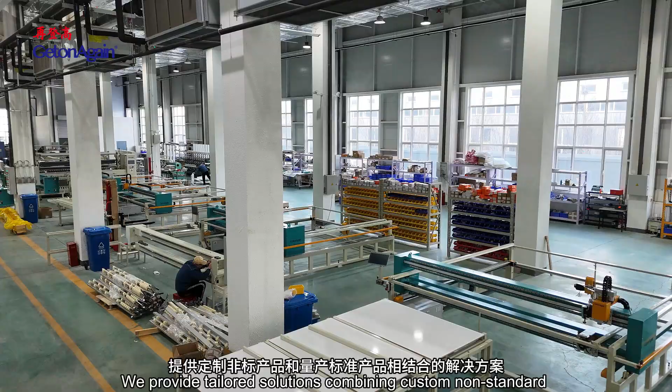We provide tailored solutions combining custom non-standard products with mass-produced standard products, including mechatronic machines, automated production lines, and intelligent factory solutions. Pattern room equipment includes magic inkjet plotter, 2 cartridge with maximum printing speed at 110 square meters per hour.

4 cartridge with maximum printing speed at 200 square meters per hour. Vertical inkjet cutting plotter, 1 machine multiple functions, pattern drawing with cutting, or standalone drawing. High-quality rotary cutting knife can cut minimum 80 grams per square meter paper for sample design, cost saving.

Flatbed inkjet cutting plotter, full speed map printing and cutting function, suitable for personalization, configured with long knife or short knife, and optional fixed knife sleeve or elastic knife sleeve, suitable for cutting various materials.

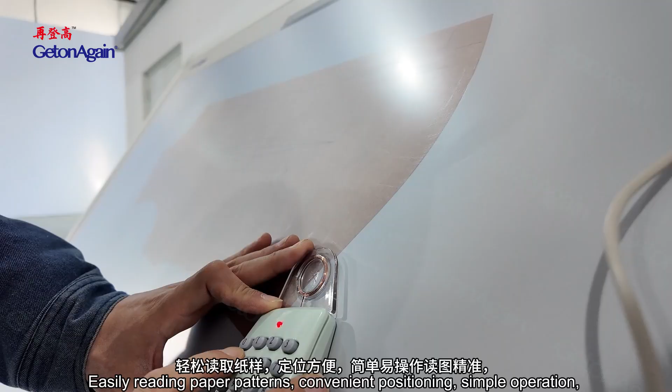Digitizer, easily reading paper patterns, convenient positioning, simple operation, accurately reading patterns, enable to speed up the design. It is a powerful tool for traditional manual drawing digitization.

Digitizer can be used in various fields, such as clothing industry, fashion design, surveying and mapping, mining, stamping and environmental protection, etc. Flatbed scanning digitizer.

One button to start after placing scanning pieces. Can vacuum absorption auto scanning auto transmission. According to different models, supports ultra long width scanning. Scanning speed up to 7,200 mm per minute.

Scanning resolution 150 to 300 dpi. High definition panoramic 1:1 image to ensure effective identification of various contours, notches, inner holes.

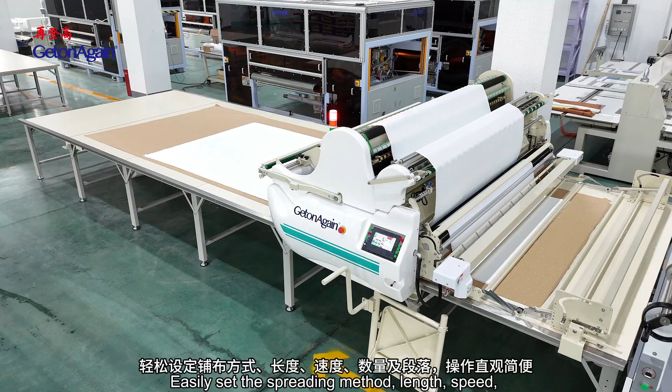Cutting equipment includes automatic spreading machine. Easily set the spreading method, length, speed, quantity and sections, with intuitive as well as simple operation. Dual use for both knit and woven fabrics, suitable for t-shirts, children's clothing, loungewear, and toy textiles.

Automatic multi-layer cutting machine. Through the combination of micron-level intelligent sensing components and an intelligent control system, dynamic compensation and correction of cutter deformation during cutting operations are achieved, significantly reducing errors between the top and bottom layers of fabric during cutting, enabling truly high-precision intelligent cutting.

Automatic single-layer cutting machine. No need to create specialized cutting molds. Cutting can be performed precisely by directly importing CAD design drawings into the equipment. Optimizes cutting paths, integrates repeated cutting lines, allows for pre-simulation of the cutting process, and supports continuous cutting for extra long materials.

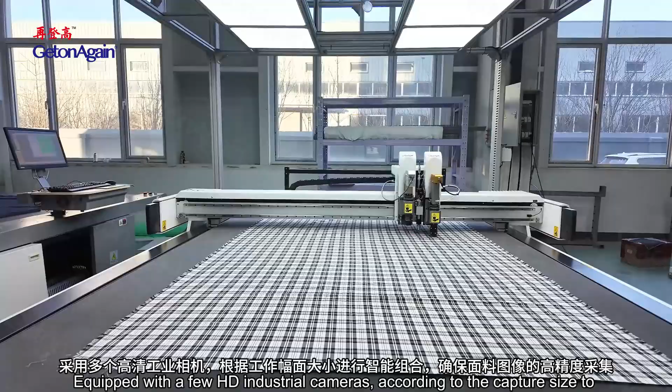Stripe and plaid matching cutting machine, equipped with a few HD industrial cameras, according to the capture size to perform intelligent combination. Ensures the high accuracy fabric image capturing.

Stripe and plaid matching auto cutter, equipped with double knives and pen draw punching working mode, special for various stripes and plaids fabric cutting in single ply.

High-end clothing customization. The effect of the alignment match stripe and plaid process has become an important measurement of the quality of this type of clothing.

Stripe and plaid auto cutter is the equipment specially developed for this process to meet matching stripe and plaid clothing, suitable for single ply cutting. Process of striped plaided fabrics.

Precision single head cap, tubular embroidery machine. Pattern rotation and proportional scaling.

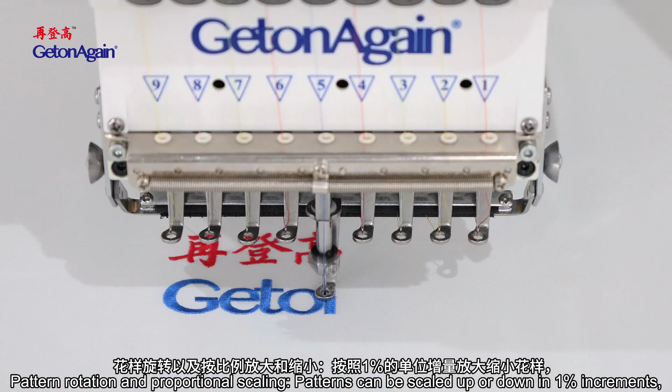Patterns can be scaled up or down in 1% increments, ranging from 50% to 200%, and rotated in equal increments, with a rotation range from 0 degrees to 89 degrees.

Precision two-heads cap, tubular embroidery machine, equipped with automatic color changing, automatic thread trimming by motor, servo motor thread hooking, and automatic thread broken detection.

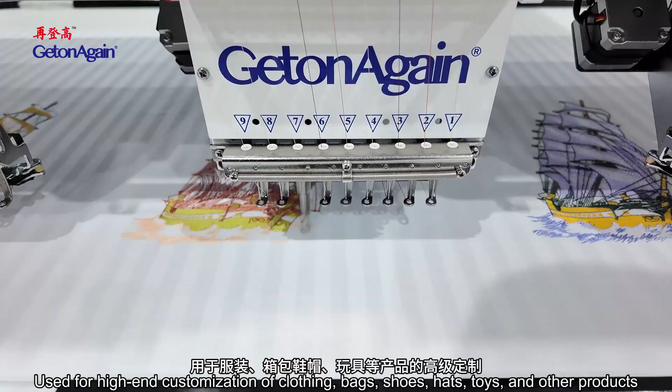6-head flat embroidery machine, used for high-end customization of clothing, bags, shoes, hats, toys, and other products.

Computerized embroidery machine. High-speed embroidery with extremely low failure rates, long service life, low noise, and stable, reliable quality. Equipped with an upper thread clamping device to prevent thread detachment and breakage, ensuring excellent embroidery results.

Suitable for textile and garment manufacturing, footwear, hats, bags, home decoration, automotive interiors, and industrial products area.

Embroidery equipment includes Cloud Smart Teaching Embroidery Machine, suitable for integrated theoretical and practical teaching of computer embroidery in fields such as fashion and apparel design, clothing design and its engineering. Mixed chenille chain stitch embroidery machine.

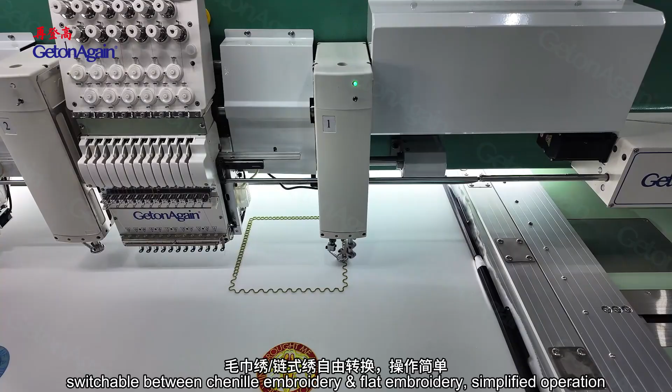Mixed embroidery feature, according to color sequence settings, switchable between chenille embroidery and flat embroidery, simplified operation. Chenille needle height can be adjusted for 10 levels according to chenille pile height or chain stitch thread thickness.

Multifunctional embroidery on garment, shoes, caps, home textile, toys, bags and luggage, art thread, etc.

Multi-head tubular embroidery machine, multi-head series, suitable for embroidering on flat, caps, garments, shoes, belts, bags, etc. Features auto thread trimmers, auto color change, auto thread break detection, 270 degree wide angle cap system, red light locating, and LED lighting, with precise head and drive system to ensure exquisite embroidery work. Drop tables easily lift up and down. Multiple heads greatly improve work efficiency, suitable for embroidery shops and factories of a certain scale.

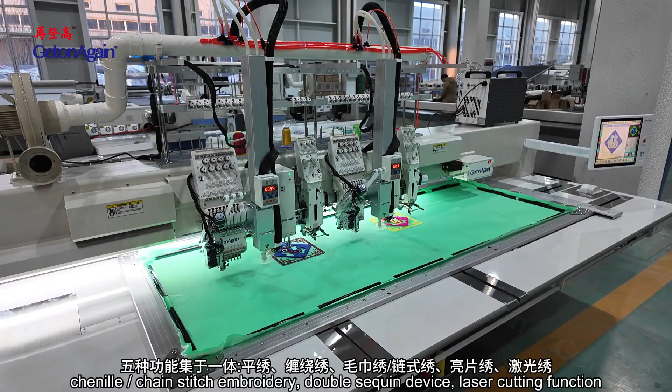Computerized 5-in-1 embroidery machine, integrating 5 functions in one machine: flat embroidery, quilting, tape cording embroidery, chenille, and chain stitch embroidery, plus double sequin device and laser cutting function. High precision, strong stereo sense, ideal artistic effect, suitable for embroidery of apparel, home textile, furniture, teaching, design, and arts and crafts, etc.

Computerized mixed embroidery machine, multifunctional integration with flat embroidery, cording embroidery, chenille, chain stitch embroidery, sequin embroidery, and laser embroidery. Expandable options support additional modules such as laser process, with fast switching between flat embroidery, quilting embroidery, or chenille embroidery, allowing you to choose any embroidery type as needed. Suitable for embroidery on garments, home textiles, home decor, education areas, R&D, and arts and crafts products.

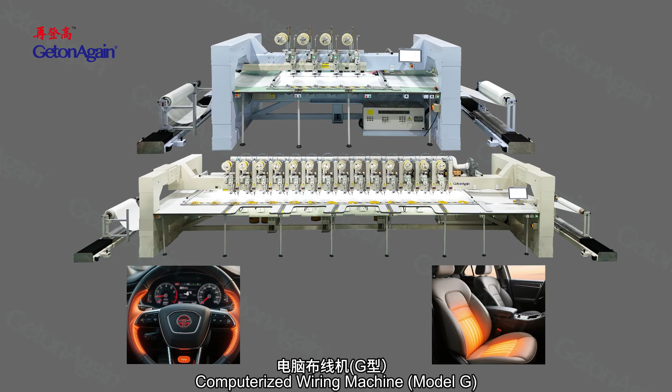Computerized wiring machine Model G. Gantry frame design ensures easy material loading, unloading, and maintains material flatness during wiring. Large spool device reduces heating wire replacement frequency during production. Automatic wire feeding device for resistance wire or other wires, with adjustable feed amount and feed fault alarms. Automatic product changeover, with roll fabric feeding in from one end.

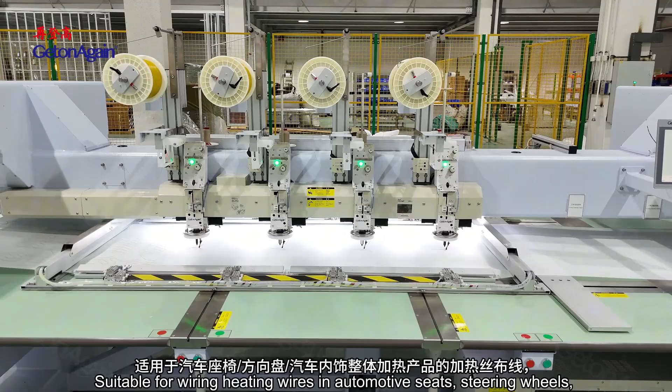After wiring, automatic take-up device pulls material with adjustable length, reducing manual pulling time and labor. Pneumatic frame with program-controlled pneumatic components for automatic opening, closing, and tensioning. Firm clamping with adjustable stretching lengths within a specified range. Suitable for wiring heating wires in automotive seats, steering wheels, and complete interior heating products, also applicable for automotive hands-off detection hot product wiring.

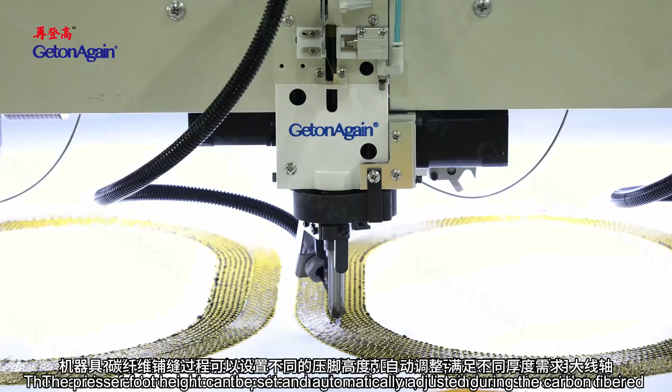Carbon fiber placement stitching machine, suitable for the layup and stitching of carbon fiber materials in industries such as automotive, aerospace, and bicycle manufacturing. Enables precise stitching with an independent feeding path for carbon fiber, significantly reducing fiber abrasion and ensuring material integrity. Enables highly accurate stitching of carbon fiber fabrics. Stitch width can be set according to different material specifications, and presser foot height can be set and automatically adjusted during the process to accommodate different material thicknesses.

Tufting series equipment includes computerized tufting machines with rotary tufting head at any angle, avoiding positive-negative stitching difference, for higher efficiency and better tufting result. Suitable for various rugs, carpets, hanging carpet, tapestry, and other flooring, decorative, and home furnishing products tufting.

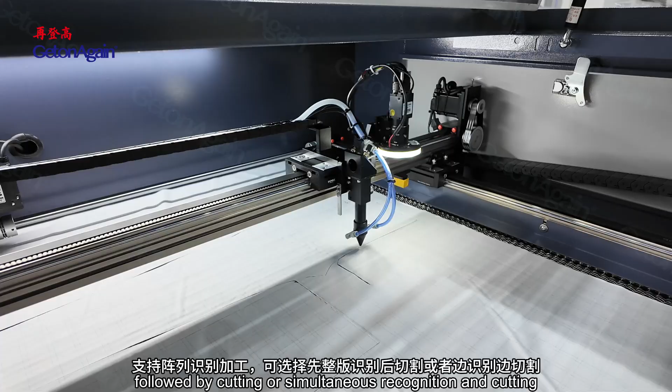Laser equipment includes small format camera positioning laser engraver cutting machine, supporting array recognition processing, with options for full sheet recognition followed by cutting, or simultaneous recognition and cutting. Features multi-template mixed cutting, allowing the recognition and positioning of different patterns to be completed in a single operation.

Laser engraving and cutting machine. The cutting center can directly and seamlessly interface with software such as AutoCAD, CorelDRAW, AI, and Garment CAD, ensuring easy operation, high cutting precision, and fast cutting speed. Suitable for clothing, home textiles, furniture, luggage, toys, car interiors, shoemaking, and other industries for cutting and carving of non-metallic materials.

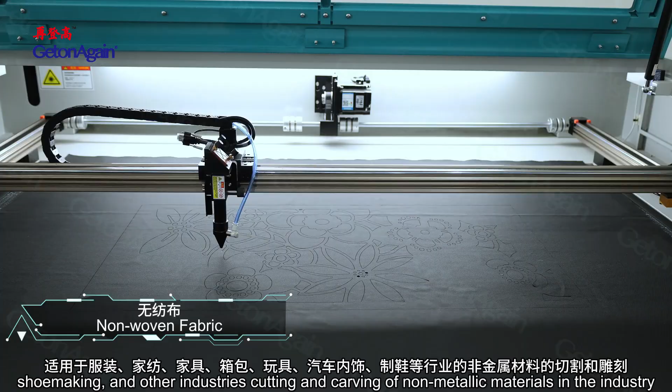Automatic feeding laser cutting machine, large format vision recognition plus auto receiving table. Advanced vision system with high resolution industrial camera captures real-time images of material patterns, accurately detects outer contours to perform precise cuts, resolving issues such as distortion in printed or stretched fabrics. Choose the most suitable positioning mode for different pattern types to optimize cutting accuracy and efficiency. Supports edge alignment and tension control to ensure smooth, wrinkle-free material feeding.

Highly automated, ideal for continuous production. Designed for precise, high-efficiency cutting of flexible materials such as digitally printed fabrics, lace with pattern alignment and shaping cutting, and heating elements with positioning requirements.

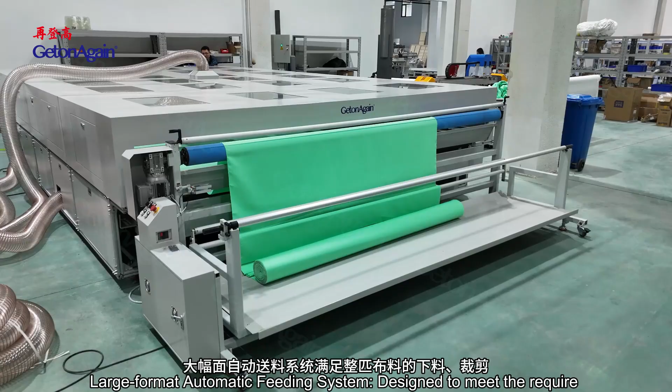Fully automatic large format laser cutting machine with inkjet device. Large format automatic feeding system designed to meet the requirements for feeding and cutting whole rolls of fabric, with inkjet and cutting functions integrated for enhanced versatility. Applicable to industries such as custom clothing, single-piece cutting, sofas, toys, footwear and headwear, textile print pattern positioning cutting, automotive interiors, industrial filtration, and advertising, etc.

Sewing equipment includes automatic arbitrary rotary single-needle leather sewing machine, suitable for automated leather pattern sewing in the fields of automotive interiors, car seat covers, car door panels, airplane seats, and leather furniture upholstery.

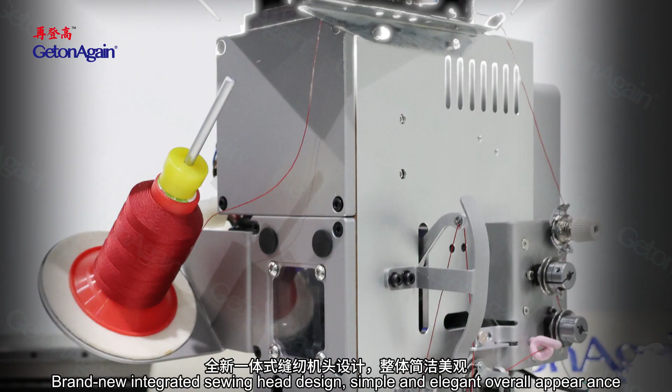Brand new integrated sewing head design, simple and elegant overall appearance. 15-inch HD industrial touch control screen. Two-size workbenches designed with a flexible mechanism, reducing size after folding for easier transportation.

Sewing head can rotate at any angle, avoiding differences between forward and reverse stitches, improving sewing efficiency and stitch quality. Pneumatic lifting head structure with a stroke of 50 mm, making frame changes and span sewing more convenient.

The advantage of an independently driven presser foot system lies in its ability to control presser foot height through real-time pattern programming, effectively addressing uneven presser foot pressure issues when sewing materials of varying thicknesses.

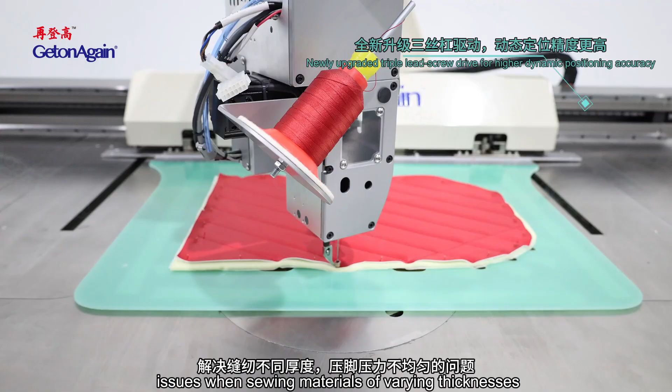Fully automatic 360 degrees template sewing machine with auto feeding. Ideal for automated sewing of thin and thick materials including quilted garments, down jackets, pillowcases, etc. Dual auto feeding system enhances efficiency and reduces operator fatigue.

Vertical head lift for easy template replacement and convenient step-over sewing. Reinforced casting body ensures consistent stitches even at high speeds, no head sinking.

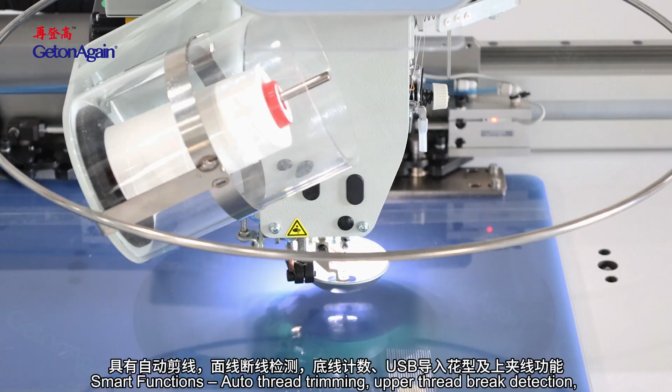Smart functions include auto thread trimming, upper thread break detection, bobbin counter, USB pattern import, and top thread clamping.

Fully automatic 360° double needle heavy-duty template sewing machine, used for automotive seats, automotive airbags, automotive interiors, home furnishings, and other double thread heavy-duty sewing.

Features include automatic thread trimming, emergency stop, thread breakage detection, bobbin thread counting, data input saving, and automatic adjustment of sewing direction. Fully servo motor control ensures high equipment stability and guarantees high-quality sewing results.

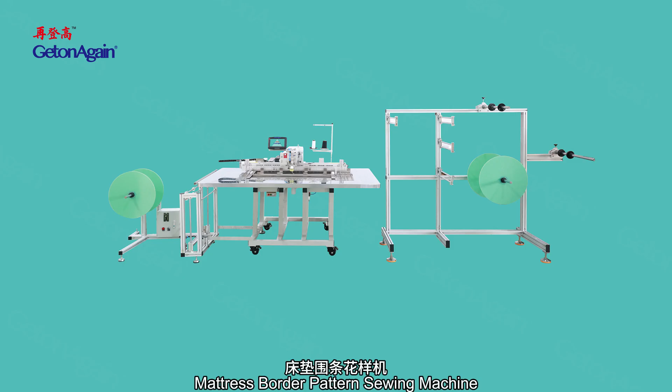Mattress border pattern sewing machine. Pneumatic presser frame securely holds fabric in place for more beautiful stitching and allows for wide-range horizontal frame movement.

Machine head with micro-oil head design ensures fabric remains free from all contamination during sewing. Pneumatic positioning device guarantees high-precision alignment at panel joints.

Features automatic thread trimming, automatic material collection, and machine error alarm for ease of operation. Standard configuration with feeding and collecting racks for streamlined workflow. Advanced sewing technology for mattress side borders.

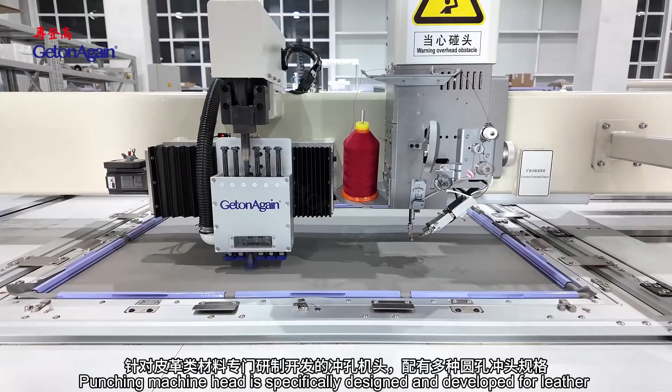Fully automatic perforation and sewing integrated machine. Punching machine head is specifically designed and developed for leather materials, equipped with various round punching tool specifications.

Sewing head up moving stroke of 50 mm, providing sufficient space for material loading and easy operation. Suitable for perforation and sewing processes of various types and thicknesses of genuine leather and microfiber leather used in car seats, automotive interiors, aircraft seats, luggage, furniture, and more.

Fully automatic embroidery and sewing integrated machine. 9-color embroidery machine head to meet the embroidery needs of different industries. The embroidery thread clamping mechanism incorporates a novel upper thread clamping assembly, effectively reducing thread breakage and slippage occurrences during operation.

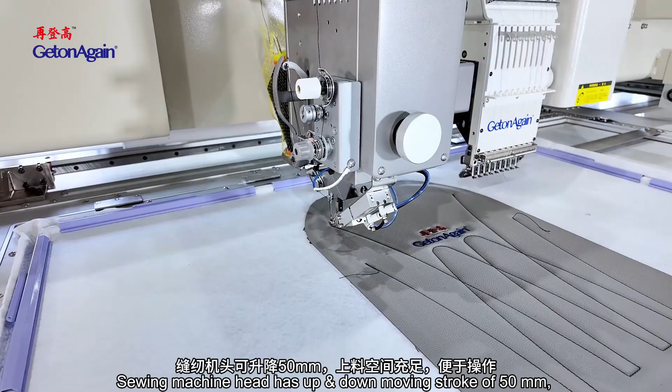Specially designed sewing machine head for leather materials, producing beautiful stitching. Presser foot height is motor controlled and highly adjustable. Sewing machine head has up-down moving stroke of 50 mm, providing ample space for material loading and ease of operation.

Suitable for various types and thicknesses of genuine leather and microfiber leather for automotive seats, car interiors, aviation seats, luggage, furniture, etc., combining embroidery and sewing processes.

Fully automatic perforation round hole, embroidery, and sewing rotating head machine. Integrates punching, embroidery, and sewing into one machine, allowing for arbitrary pattern design and seamless combinations of punching, embroidery, and sewing for complex processes. The 9-color embroidery head meets the embroidery needs of various industries.

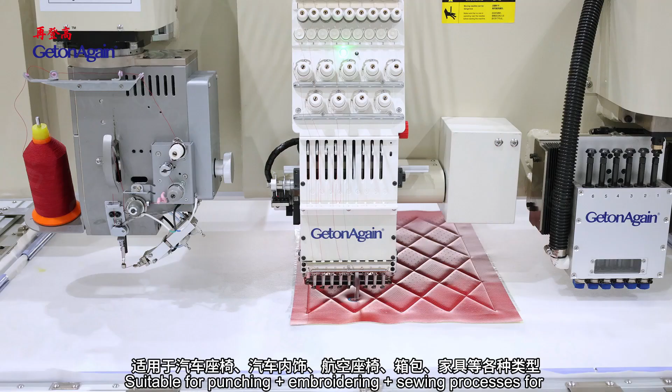Sewing machine head features an arbitrary rotation structure, creating beautiful stitching, reducing frame movement frequency, and improving efficiency. Suitable for punching, embroidering, and sewing processes for various types and thicknesses of genuine leather and microfiber leather used in automotive seats, car interiors, aviation seats, luggage and furniture, etc.

Fully automatic round perforation and 9-color embroidery and fixed head sewing machine, Super M. Integrates punching, embroidery, and sewing into one machine, allowing for arbitrary pattern design and seamless combinations of punching, embroidery, and sewing for complex processes. The 9-color embroidery head meets the embroidery needs of various industries.

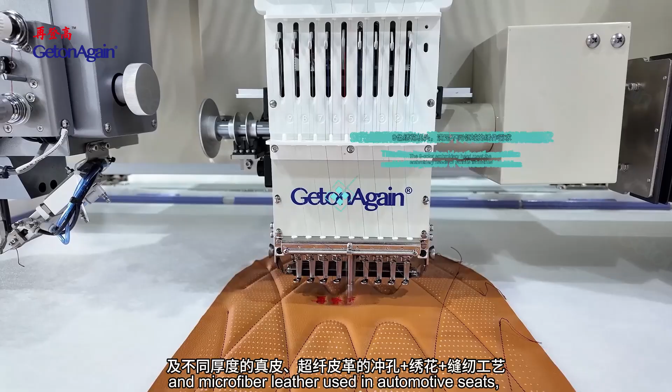Sewing machine head features an arbitrary rotation structure, creating beautiful stitching, reducing frame movement frequency, and improving efficiency. Suitable for punching, embroidering, and sewing processes for various types and thicknesses of genuine leather and microfiber leather used in automotive seats, car interiors, aviation seats, luggage and furniture, etc.

The 9-color embroidery head meets the embroidery needs of various industries. Sewing machine head features an arbitrary rotation structure, creating beautiful stitching, reducing frame movement frequency, and improving efficiency. Suitable for punching, embroidering, and sewing processes for various types and thicknesses of genuine leather and microfiber leather used in automotive seats, car interiors, aviation seats, luggage and furniture, etc.

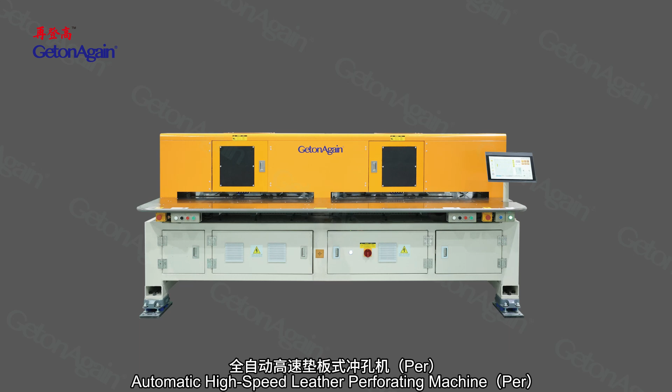Automatic high-speed leather perforating machine for punching processing of leather or microfiber leather with various types and different thicknesses, such as car seats, aviation seats, shoes, bags and furniture, etc. Full-scale, 3-dimensional protective design ensures safer operation.

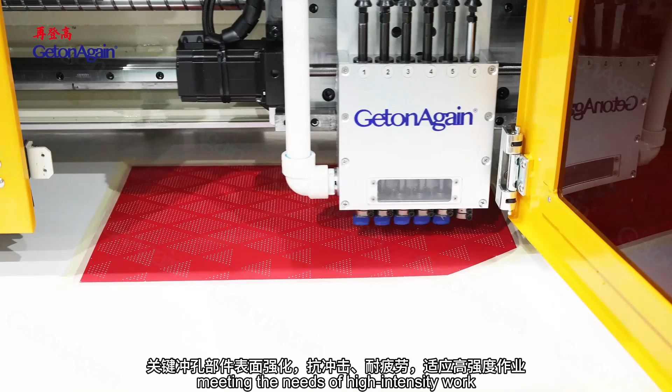The punch toolbox is heightened to prolong the punch tool's spring's service life and reduce part wear. The XY axis uses a ball screw direct drive for high-precision punching. The surface of key punching parts is strengthened to resist impact and fatigue, meeting the needs of high-intensity work. Single-head machines can make up to 2000 holes per minute, and double-head ones up to 4000.

Automatic template sewing machine, rotary head, heavy material. Both the X and the Y axis use a screw and slide transmission method, providing high precision and good stability. Suitable for pattern sewing on leather and heavy materials, such as car seats, sofas, massage chairs, boat interiors, and aircraft seats. The machine head can rotate freely to ensure the quality of the sewing stitches.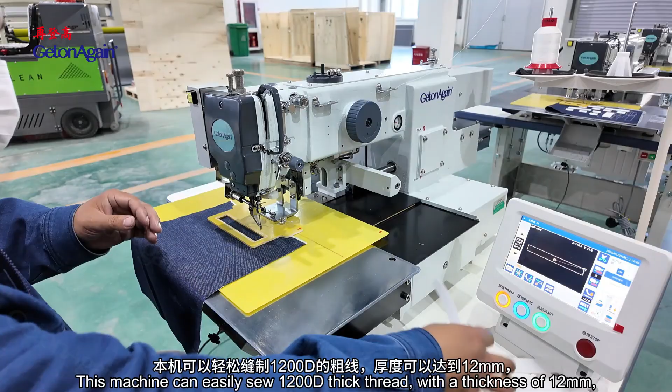Pattern sewing machine. This machine can easily sew 1200 D thick thread with a thickness of 12 mm, 2 times, large rotary hook, automatic thread trimming, and the maximum sewing speed can reach 2500 RPM.

Automatic laser pocket opening machine: automatic ironing-free pocket folding, automatic material feeding, laser pocket opening, automatic sewing, automatic thread trimming, and automatic material collection. For front and back pockets for men's and women's clothing, suits, inner and outer pockets of jackets, dress pants, hoodies, sun protection clothing, school uniforms, sportswear, cotton padded jackets, down jackets, workwear, jackets, uniforms, trench coats, cashmere coats, and plackets for polo shirts.

Quilt edge binding machine. Features of single needle compound feed, achieving cutting, binding, and sewing in one seamless operation. Enlarged right side waste discharge port with pneumatic waste discharge assistance ensures smoother disposal of waste generated during edge cutting.

Special synchronized feeding structure, including alternating presser foot, needle, feed dog, and binding attachment. Ensures no wrinkles or misalignment during straight line or corner sewing for a flawless binding effect. Designed for edge binding processes of quilts such as cotton quilts, summer quilts, spring and autumn quilts, and other bedding items.

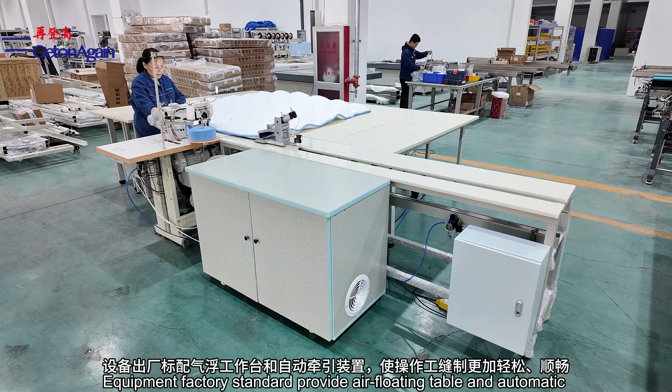Quilts and mattress binding with pulling sewing workstation. Equipment factory standard provides air floating table and automatic pulling device, making sewing worker operation easier and smoother. Equipped with PLC control pulling device synchronized with sewing machine electronic control, these two machines work at the same speed and synchronize direction.

Optional automatic storage and vacuuming device improves efficiency, reduces dust emissions, and provides the sewing operator a clean and tidy working environment. Binding result is rich with a strong, solid feel. Corners are smooth and nice. Evenly stitched length, no hairy edge, no edge folding, no corner raising effect, and other negative symptoms eliminated.

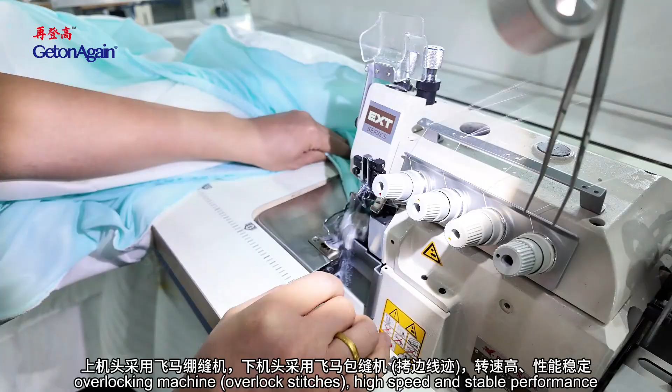Automatic mattress protector skirting sewing machine, interlock and overlock. Upper head with Pegasus interlock sewing, lower head with Pegasus overlocking machine overlock stitches. High speed and stable performance. Suitable for processing fitted sheets, all-in-one to finish binding stitching of elastic rope cord and bed skirt, and the overlocking of bed skirt to mattress protector topper layer.

Automatic mattress protector skirting sewing machine, edge overlock. Upper and lower head with Pegasus overlocking machine overlock stitches. High speed and stable performance. The upper and lower workpieces work synchronously, integrating the sewing of rubber band, banding, and the sewing of bed skirt to the mattress protector layer all finished in one.

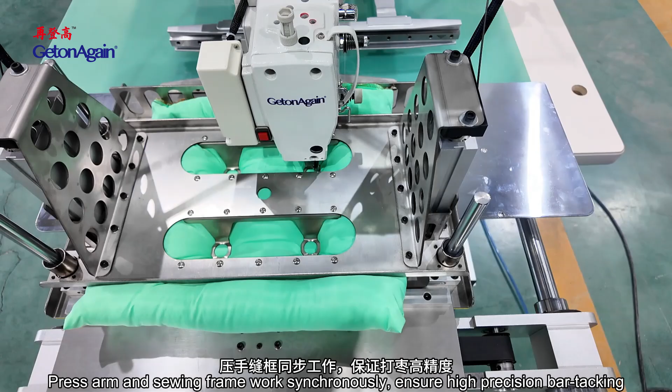Multi-hole bar tacking machine. Press arm and sewing frame work synchronously, ensuring high-precision bar tacking, suitable for chair pad, cushion and pillow, all those with fillings, and bar tacking requirements for reinforcing sewing work.

Long arm label sewing machine. Adopted connecting rod thread pickup, large rotary hook, needle bar, swinging up and down feeding simultaneously, forming zigzag lock stitch. Reasonable swing mechanism makes switching between zigzag sewing and normal lock stitch easy and free. Upper and lower synchronous feeding structure makes it easy to operate, with good sewing effect and beautiful stitches.

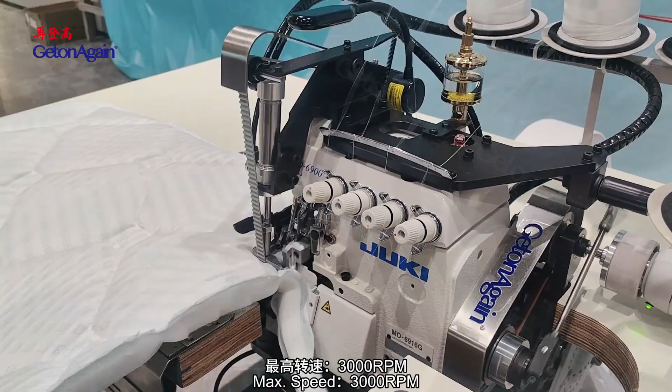Mattress flanging machine, equipped with a Juki machine head from Japan and a double bar twin needle design. Easily switches between thick and thin fabrics sewing. Flanging thickness 10 mm to 70 mm, max speed 3000 RPM, planing width 25 mm.

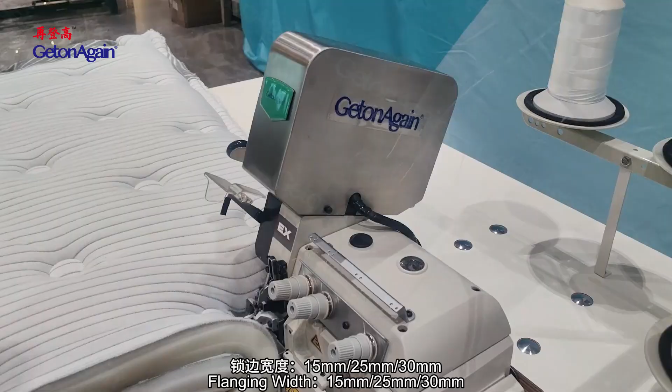High speed mattress flanging machine. Effortless switching between thick and thin fabrics sewing. Synchronized feeding presser foot structure provides excellent feeding capability, enabling ultra-thick fabrics that standard machine heads cannot sew to pass through smoothly. Flanging thickness 10 to 90 mm. Automatic lubrication and cooling system for the synchronized feeding structure. Max speed 4000 RPM. Flanging width 15 mm, 25 mm, 30 mm.

Heavy-duty mattress flanging machine. Innovative drive mechanism ensures more convenient and powerful sewing performance. Adjustable stitch length of 4.5 to 6 stitches per inch. Easily switches between thick and thin fabrics sewing. Capable of overlocking extra thick mattress fabrics ranging from 10 mm to 90 mm. Maximum sewing speed reaches up to 4,500 stitches per minute. Overlocking width is 25 mm.

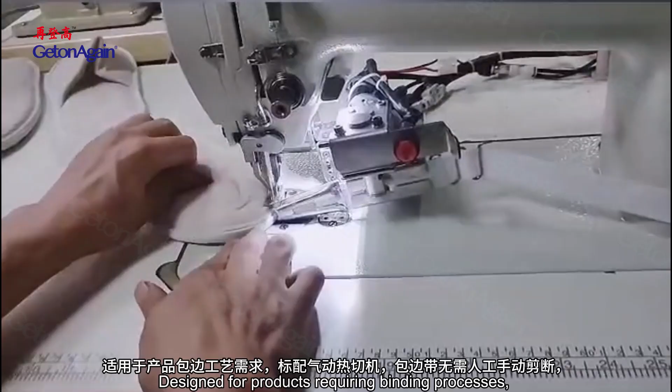Computerized synchronized hot cutting binding machine. Designed for products requiring binding processes, it is equipped with a standard pneumatic hot cutter. The binding tape no longer requires manual cutting. Simply press a button to complete precise cutting. The hot cutting edges are clean, with no fraying or loose threads, significantly improving production efficiency.

Mattress handle stitching machine. Fully automatic operation, controlled via touch screen. Customized stitching patterns is possible, significantly improving production efficiency. Easy to operate, precise positioning.

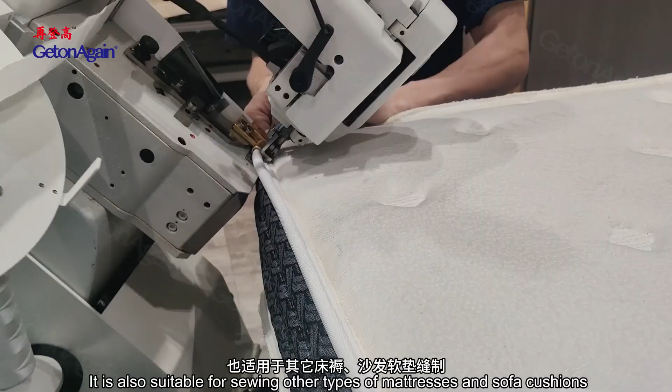Semi-automatic mattress tape edge machine, primarily designed for sewing spring mattresses. This machine efficiently completes edge overlocking between mattress fabric and sidewall fabric. It is also suitable for sewing other types of mattresses and sofa cushions. Key features include an electrically adjustable work table with high-strength, independent support, ensuring exceptional stability during operation.

Intelligent tabletop overlock flanning machine, equipped with a modified Juki thick material overlock machine head. Newly designed ultra-high lifting presser foot with a lifting height of 35 mm. Machine head can move, making threading and daily cleaning more convenient. Flanning thickness 10 mm to 80 mm. Easily switches between thick and thin fabrics sewing.

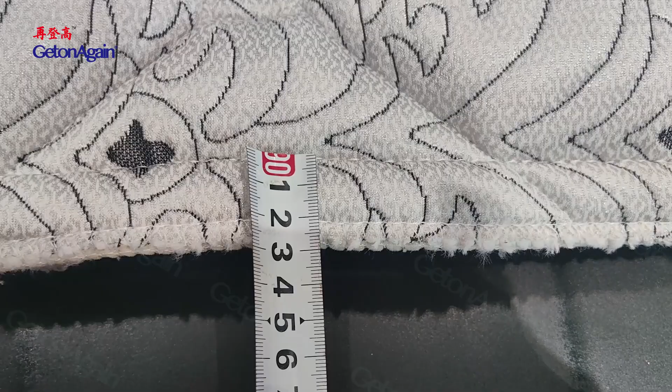Auto flip tape edge machine. Automated transfer table and mattress turnover arm enable the operator to work in one position without moving around. Variable speed drive automatically slows down on turning corners. The machine head can rotate freely to ensure the quality of the sewing stitches. When ready to sew the opposite side, the turnover arm unit flips the mattress automatically. Machine head height and inclination are adjustable.

Industrial sewing machines include various overlock and lock stitch machines. Flat tape edge machine, mainly used for stitching between mattress fabric and side border. Suitable for sewing other soft mattresses, bedding, sleeping bags, and tents. Stable performance, little vibration, low noise, and high efficiency.

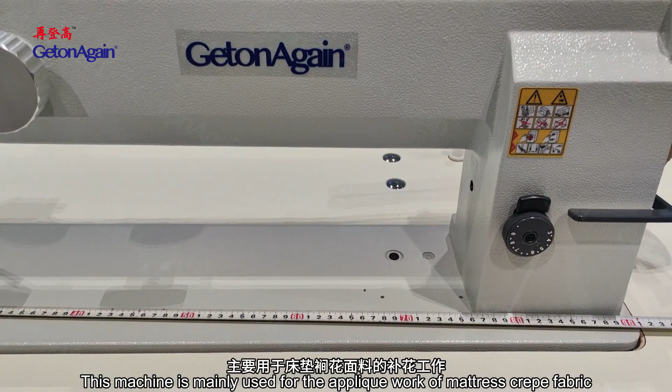Long arm repairing machine. This machine is mainly used for the applique work of mattress crepe fabric. The upper and lower shafts of the machine are of integral structure, and a Taiwan servo motor is used to automatically position the needle. The new presser foot is equipped with a needle bar lifting device to make the thick fabric appliqué more convenient and beautiful.

Quilting equipment includes the computerized multi-head rotary hook quilting machine model N, a double row lock stitch multi-head quilter with a large rotary hook. Max speed of 1500 RPM, more than 2 to 3 times that of a normal shuttle quilting machine, greatly improving work efficiency. 3-fold capacity rotary hook means less bobbin changing frequency. Beautiful stitches, no lost stitch, no thread loops.

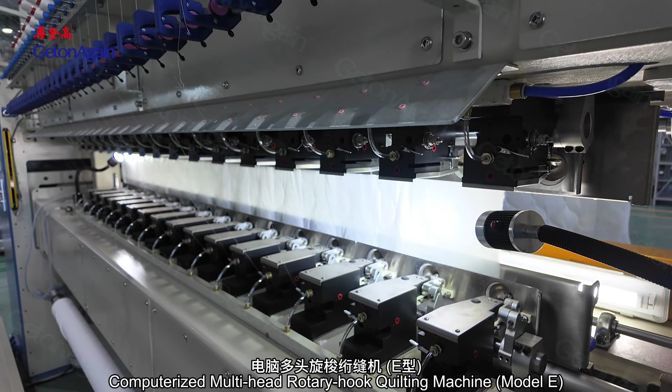Computerized multi-head rotary hook quilting machine model E, with a 5-time jumbo rotary hook for less bobbin changing frequency. Beautiful stitches, no lost stitch, no thread loops. The interval between the upper and lower needle bars can be adjusted to any value from 3 to 9 inches. The lower needle bar can move half a needle pitch in the X direction, so that quilting needle bars of different sizes and patterns can be combined, especially for non-standard size patterns, achieving a unique effect.

Computerized multi-needle shuttle quilting machine, flying shuttle type, for quilting of fitted sheets, bed covers, summer quilts, and clothing products with quilting patterns.

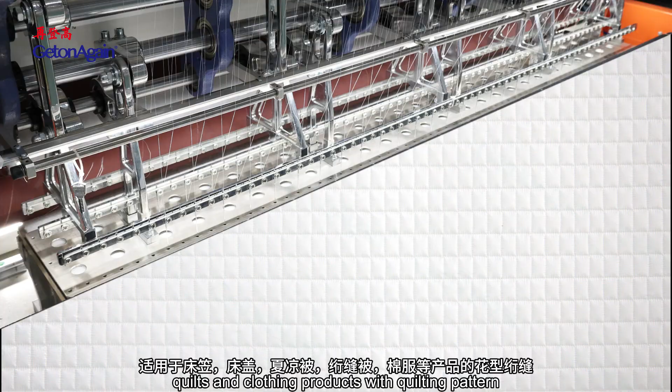Computerized multi-needle chain stitch quilting machine, servo motor-driven rollers and lead screws ensure precise quilting patterns, suitable for mattresses, mattress covers, sofas, bedding, home textiles, and home decor.

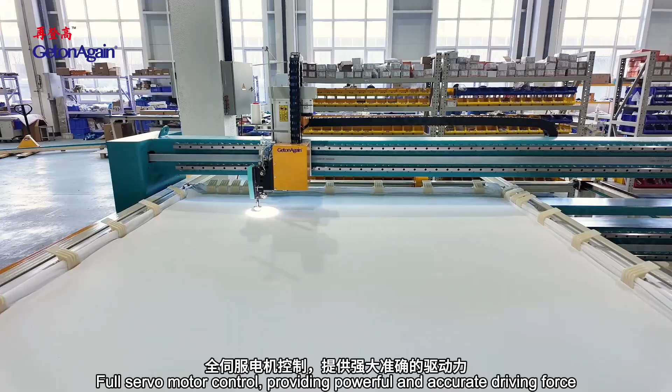Computerized single head quilting machine, frame pipe belt support. High precision process stand ensures stable needle, hook clearance and longer service lifetime of rotary hook. Extendable quilting frame, able to adjust the desirable size of quilting freely. Specially designed quilting head, presser foot with individual driving, suitable for quilting material of various thickness. Full servo motor control, providing powerful and accurate driving force, greatly improved quilting precision.

Automatic thread broken detection function. The machine will stop after thread breaks. Optional automatic bobbin changer. It is suitable for large area quilting and high-quality pattern products, such as furniture upholstery, sofas, headboards, soft beds, conference enclosures, or products with heavier materials, such as gravity quilts, etc.

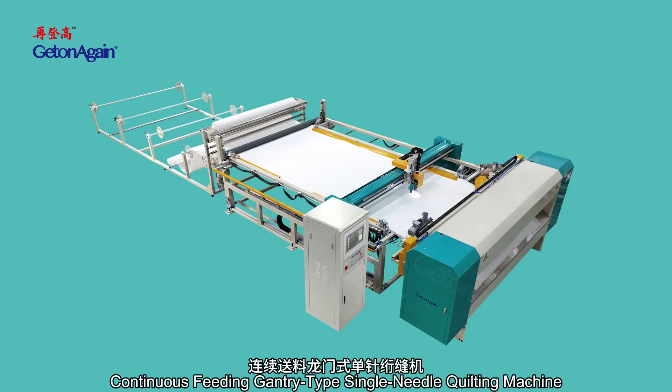Continuous feeding gantry type single needle quilting machine. Suitable for single needle automatic quilting of mattresses, duvets, blankets, mattress protectors, upholstered furniture, and similar products. Fully automated workflow, automatic feeding, material pulling, quilting, and cutting, all completed in one integrated process.

Continuous feeding gantry type single needle quilting machine, double saddle model. Double saddle frame design allows simultaneous quilting of 2 pieces, doubling quilting efficiency. Specially designed lift type quilting head with a lifting height up to 150 mm, suitable for quilting materials of various thicknesses, maximum speed of 3000 revolutions per minute.

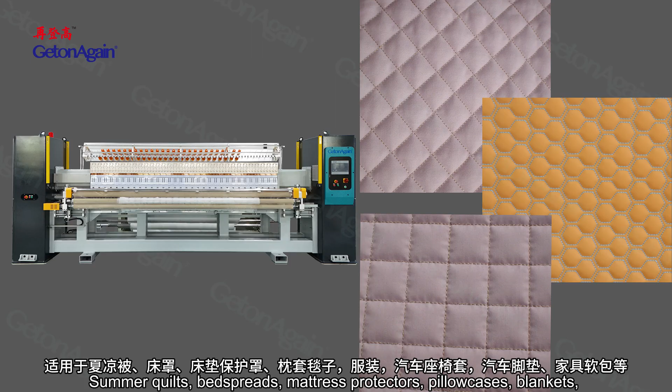Computerized single-color single-row quilting and embroidery machine Model A. For summer quilts, bedspreads, mattress protectors, pillowcases, blankets, garments, car seat covers, car floor mats and furniture upholstery, etc. Equipped with a new high-speed double needle quilting and embroidery machine head with surface coating treatment for parts. Maximum speed 1000 rpm, recommended operating speed 750 to 850 rpm.

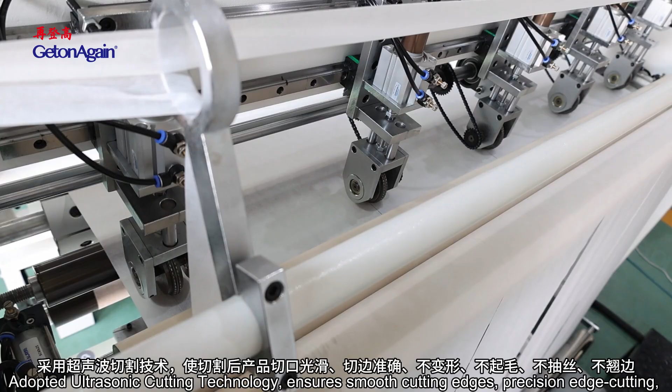Ultrasonic equipment includes ultrasonic slitting machine, adopting ultrasonic cutting technology, ensures smooth cutting edges, precision edge cutting, no deformation, free without fraying, no fiber pull, and no edge curling problem after cutting. Cutting rollers and patterns can be customized to meet various needs.

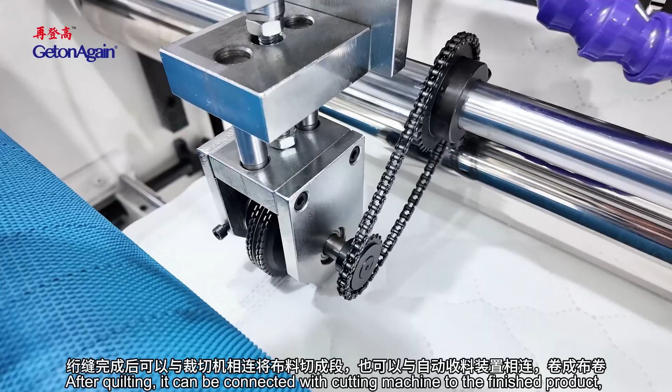Automatic ultrasonic quilting machine, integrating ultrasonic sewing and ultrasonic edge sealing and cutting automation into one, completing the process in a single step. The latest structure design with interleaved transducers ensures embossing seamless non-wrinkles. After quilting, it can be connected with a cutting machine for the finished product, or connected with a rewinding device for fabric rolls.

Ultrasonic quilting machine bonds multi-layer polyester fabric, non-woven fabric, polyester wadding, or artificial leather, etc., and embosses different patterns on it. Patterns are clear and beautiful, and fabric doesn't deform, with strong bonding and high efficiency.

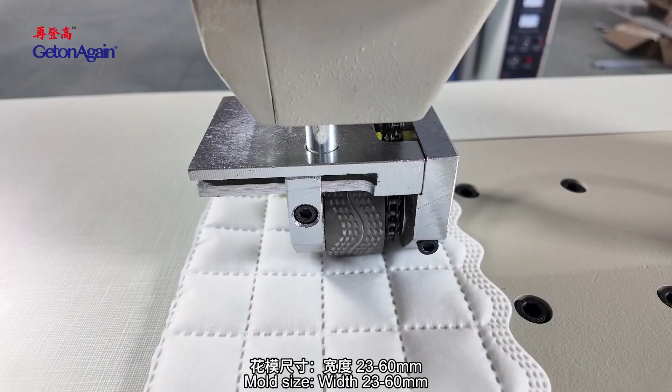Ultrasonic lace machine. Ultra-high power output with adjustable power to meet the welding and cutting requirements of different materials and thicknesses. Mold size 23 to 60 mm. Mold lifting system with options for manual or pneumatic operation.

Stripping, simultaneous single or multi-strip cutting with edge melting treatment for clean, fur-free edges. Pattern molds and welding heads undergo special hardness treatment for higher wear resistance. Various patterns can be customized as needed.

Cutwork lace cuts various patterned holes with edge melting treatment, high running speed and simple operation. Bonding seamlessly fuses 2 or more layers of fabric together without thread or needles, ensuring strong welding strength. Forming, cutting, bonding, and embossing in one reduced forming process. Edge cutting, straight or curved single edge cutting with edge melting treatment to ensure smooth, neat, and fur-free edges. Suitable for lace, decorative ribbon, home textile products, umbrella lace, tablecloths, automotive interiors, non-woven shopping bags, carbon bags, eyeglass cloth, etc.

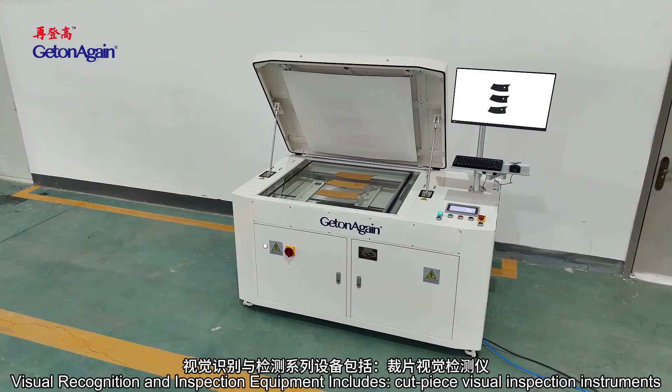Visual recognition and inspection equipment includes cut piece visual inspection instruments. After manual placement, one-click start allows for automatic scanning, automatic inspection of cut pieces, and automatic data storage. Scanning speed can reach up to 120 mm per second, with no need for additional lighting, ensuring reliable use in all weather conditions. Scanning resolution is 150 to 300 dpi, and the high-definition panoramic 1:1 image ensures that the inner and outer contours of the cut pieces are clearly visible.

The automated production line series includes the multi-needle quilting machine, flying shuttle and cutting machine, and 4-side tape binding machine production line.

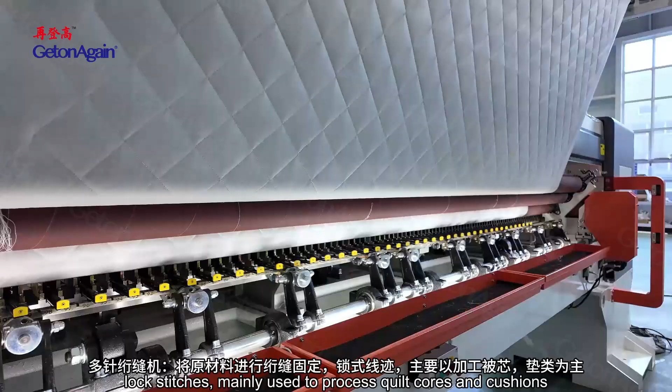The multi-needle quilting machine quilts and fixes lock stitches on raw materials, mainly used to process quilt cores and cushions. The cutting machine cuts the quilted semi-finished materials, including trimming, fixed length cutting, slitting, and rolling, and other functions.

The alignment platform is a material transfer alignment mechanism. The cutting block waits to enter the next sequence on this platform, and at the same time, the cutting block is aligned with the subsequent reference processing position by translation.

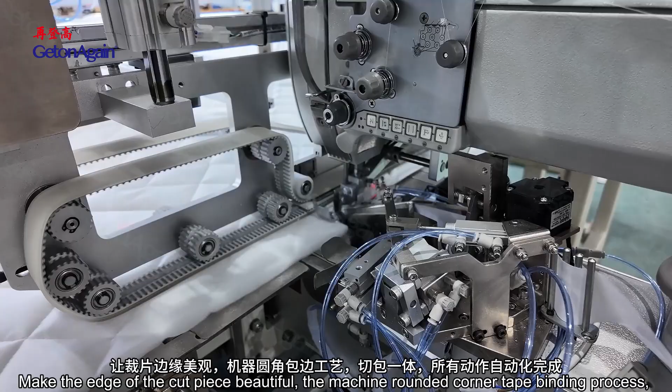The automatic tape binding machine processes the cutting piece to make the edge beautiful, using a rounded corner tape binding process. The cutting and tape binding are integrated, and all actions are completed automatically.

The computerized multi-head rotary hook quilting machine and 4-side edge sewing machine can quilt patterns in various sizes without changing needle positions, greatly enhancing operational efficiency.

The double row machine with lower needle row can move half of the head distance in the X direction, creating combination patterns of different sizes when coordinated with the upper needles.

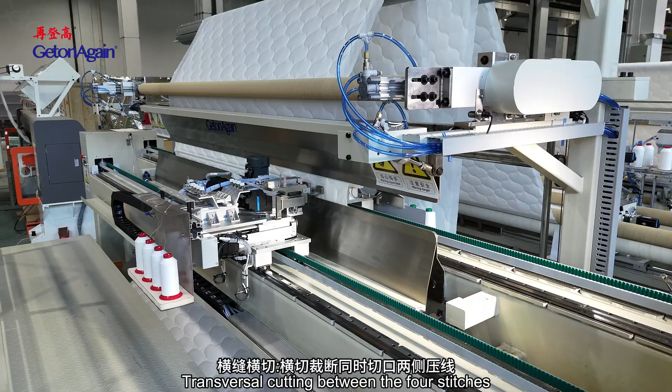Longitudinal sewing uses double chain stitch, with optional lock stitch or overlock stitch. Transversal sewing uses multi-needle chain stitch sewing, with transversal cutting between the 4 stitches, cutting as per set length and feeding to the next sequence.

The automatic blanket straight corner binding machine can hold 2 rolls of non-elastic fabric, equipped with edge alignment function, automatically pulling and cutting into panels. Pulling lengths can be set freely. It performs a 4-side tape binding sewing process for inelastic blankets.

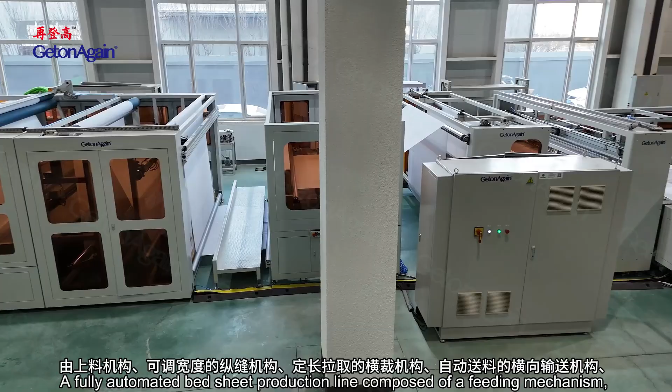The automatic bed sheet production line is a fully automated line composed of a feeding mechanism, an adjustable longitudinal sewing mechanism, a fixed length transverse cutting mechanism, an automatic transverse conveying mechanism, an automatic hemming transverse seam mechanism, and a discharging mechanism. The automatic bed sheet two side hemming machine is suitable for continuous double-sided hemming and cutting of fabrics in home textile products manufacturing, such as bed sheets, flat sheets, and curtains.

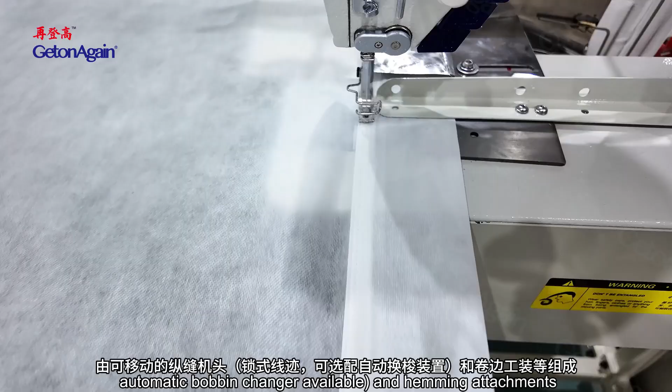It supports both rolled and flat fabric feeding methods. Standard features include material shortage detection, automatic edge correction, and edge trimming. Equipped with dedicated hemming tooling, adjustable hemming size from 12mm to 100mm, it comprises a movable longitudinal sewing head with optional lock stitch, automatic bobbin changer available, and hemming attachments. A chain stitch sewing head is also available based on process requirements.

A rotary blade mechanism provides automatic fabric cutting, with optional ultrasonic edge sealing available. The machine automatically pulls out fabric to the preset length, and after stacking the preset quantity of bed sheets, it conveys them laterally for discharge.

The automatic vacuum pillow filling production line is suitable for loosening and weighing filling polyester short fiber raw materials, greater than 0.7D, into products such as pillows, cushions, back cushions, and sofa pads.

It features fully automatic one-button start, precise weighing filling, simple operation, and uniform filling, with PLC program control, automatic cotton feeding, negative pressure cotton filling, and automatic clamping tools for bagging.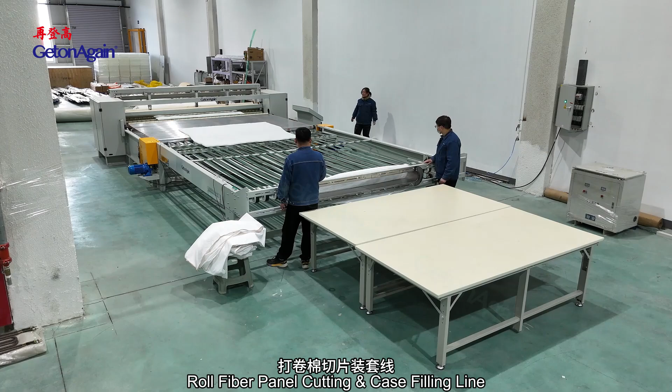The roll fiber panel cutting case filling line performs edge trimming, length counting, and cutting for polyfiber, thermal bonded wadding, and chemical bonded wadding. Machine features include an unpowered material loader that can pass bonded wadding to the panel cutter machine, equipped bearings on each roller for labor and energy saving, and electric fly knife automatic cross cutting.

2 sets of longitudinal hard cutting blades can be increased or decreased according to product variant. The machine automatically feeds the wadding fibers into the comforter envelope case after cutting off. Length is controlled by computer and can be set to any value according to requirement.

The automatic sewing machine towel cross sewing machine features intelligent control and one-touch start. One operator can control multiple units, reducing labor intensity.

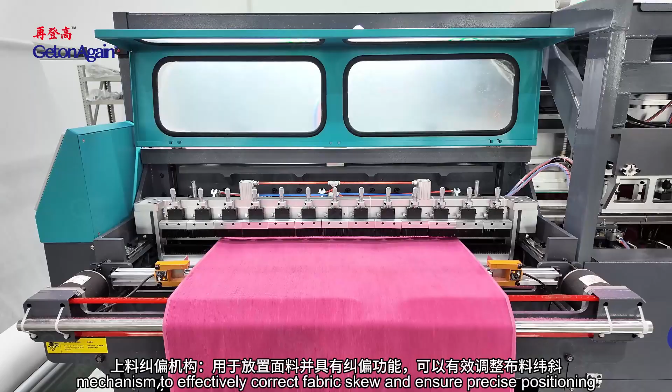Automatic fabric alignment is equipped with a feeding and alignment mechanism to effectively correct fabric skew and ensure precise positioning. A rear sweeping and pressing device ensures towels are laid flat and fixed in position for stacking or subsequent processing.

A preset length cutting mechanism allows adjustable cutting lengths to meet various production needs. An edge folding mechanism performs precise edge folding on both sides of the towel. Automatic labeling supports both single and folded labels with automatic feeding and code cutting.

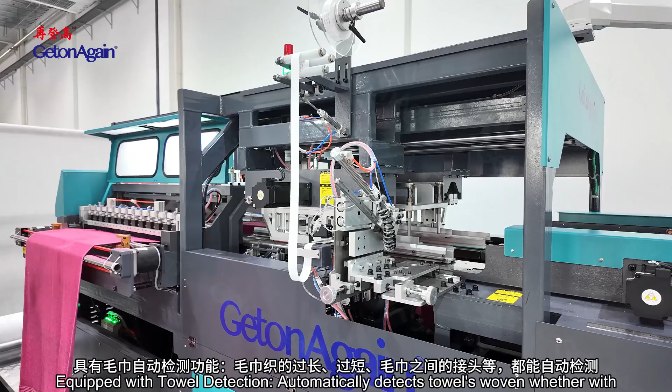Equipped with towel detection, the machine automatically detects towels woven with unsuitable lengths, the joint seams between towels, and more can all be detected. The sewing mechanism uses an international brand sewing head, ensuring beautiful and consistent stitching.

Edge folding and sewing of unfinished and non-elastic towels.

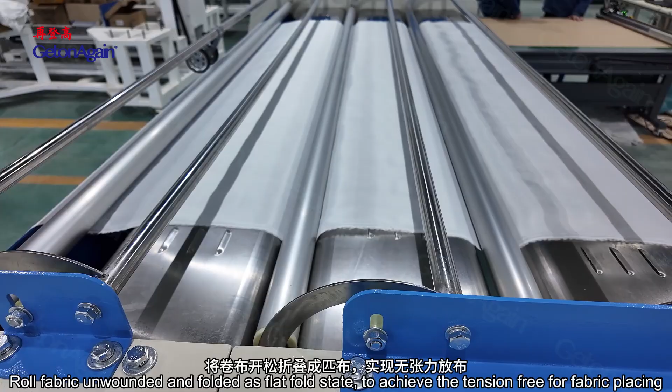Pre-sewing auxiliary equipment includes automatic edge alignment, a relaxing machine, and air blowing; roll fabric is unwound and folded into a flat fold state to achieve tension-free fabric placing, using a wave-type air blowing device. In the loosening fabric process, fabric is relaxed by the blowing device.

The automatic marking machine has one-click start and intelligent grabbing; one person can operate 4 to 5 machines at the same time, reducing labor cost. It features automatic number adjustment, automatic counting, wrinkleless operation after flipping, continuous numbering, and accurate, clear positioning, used for cutting pieces for jeans, shirts, workwear, and down garments, etc.

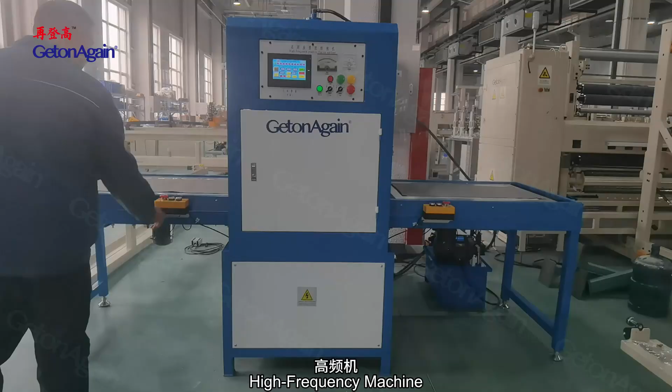High-frequency machine with built-in stepless heating system, adjustable temperature from 0 to 300, providing auxiliary heating to shorten processing time. Spark suppressor instantly cuts off current during sparking to prevent damage to molds and materials. Automatic overcurrent protection device protects electronic tubes and molds, extending their service life. Used for embossing and stamping for car and motorcycle foot mats, blister packaging, plastic heat sealing and leather embossing.

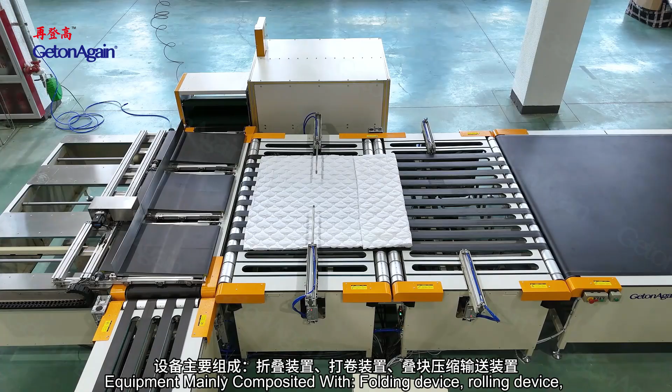Fully automatic winding machines. Post-finishing equipment includes an automatic folding and packaging machine, mainly composed of a folding device, rolling device, and stacking, compression and conveyor device.

Folding device: after the quilt is detected and transported to the designated position by sensors, a robotic arm folds the quilt into a strip shape. The strip-shaped quilt is then detected, transported to the designated position, and folded into a block shape by a robotic arm. Rolling device: the strip-shaped quilt is transported to the automatic rolling device to complete the rolling process.

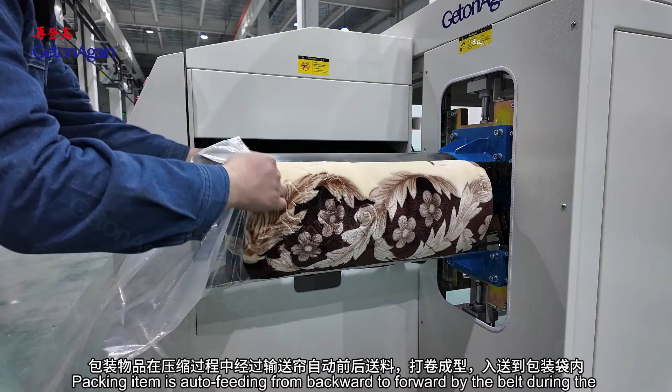Quilt roll packing machine, suitable for rolling and packing fluffy items such as quilts, pillows, cushions, etc., to reduce volume and storage as well as lower transportation costs. The packing item is auto-fed from backward to forward by the belt during the compressing process and rolled to pack into the bag.

Double cylinders, double operation, optional models. Double cylinders for double sealing, or single cylinder for single sealing; the double cylinder design increases the compression pressure and area. With the double seal design, two workers operate two products at the sides of the machine, greatly improving work efficiency, suitable for compressed packing of pillows, cushions, bedding, plush toys and other products.

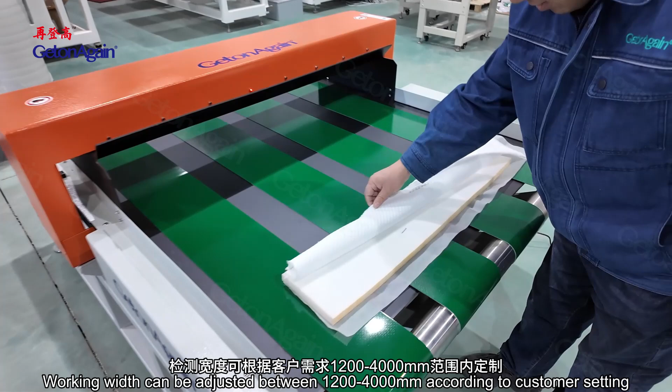Needle detector, applicable for large bulky products with ferromagnetic metal detection, for example bedding. Working width can be adjusted between 1,200 to 4,000 mm according to customer setting.

Epaulet flipping machine replaces manual operation with high efficiency, safety and reliability, suitable for the flipping and turning process of epaulets or straps of various sizes and other products.

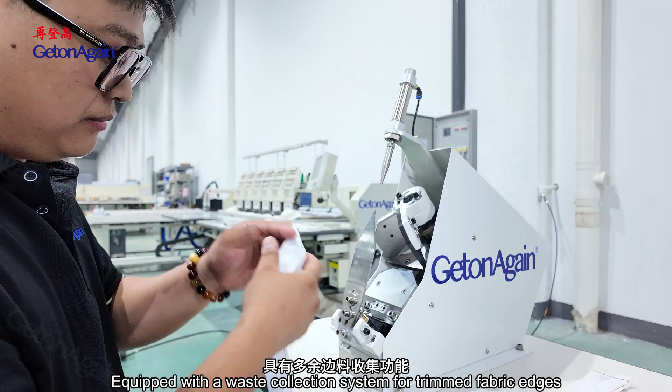Collar corner trimming and turning machine efficiently trims excess seam allowance from collar corners. Upper cutting blade angle is adjustable; simply change the lower blade to achieve different cutting angles. Equipped with a waste collection system for trimmed fabric edges, and pneumatically operated for superior collar turning results. Ideal for shirt collar turning processes.

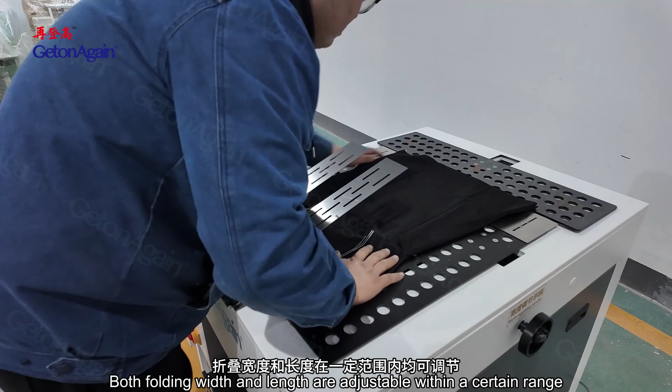Single and dual head cap pressing machine for baseball caps. Steam time, cap clamping time, steam output, and air consumption can all be automatically adjusted. Built-in steam generator eliminates the need for an external boiler, with automatic water supply, suitable for bulk order production needs. Using a robotic arm, it can automatically grip the cap; simply place the cap on the mold to complete the pressing process.

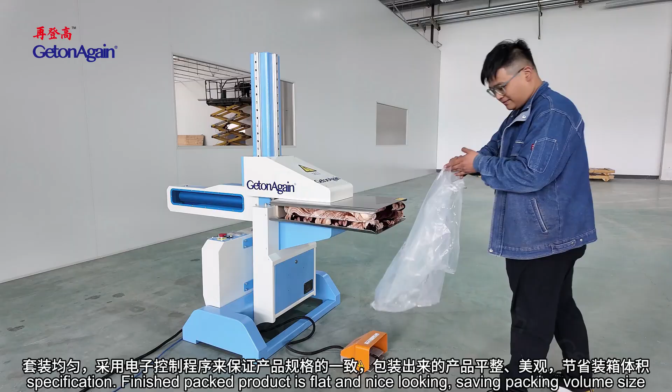Compression bagging machine: automatically compresses and, with an air cylinder, side pushes the product for bag packing, greatly improving work efficiency. The bagging is even, with an electronic control program ensuring consistency of the product. The finished packed product is flat and nice looking, saving packing volume size. Compression stroke is adjustable to fulfill various sizes of packaging, and machine mold tools can be customized according to actual requirements. Suitable for compression bag packing of pillows, cushions, quilts, bedding, etc.

Garment CAD includes Garment CAD, Super Nesting, Template CAD, Intelligent Tufting CAD, Wire Stitching CAD, Perforation and Embroidery CAD.

In addition, GetonAgain has developed a digital operation and management system for industries such as garment processing and machinery manufacturing. This system helps customers improve production efficiency and management levels. Its features can be summarized as the 4 ones: 1 industrial enterprise, 1 technology platform, 1 data standard, and 1 operating system. It is the optimal choice for enterprises to achieve digital transformation and intelligent upgrading.

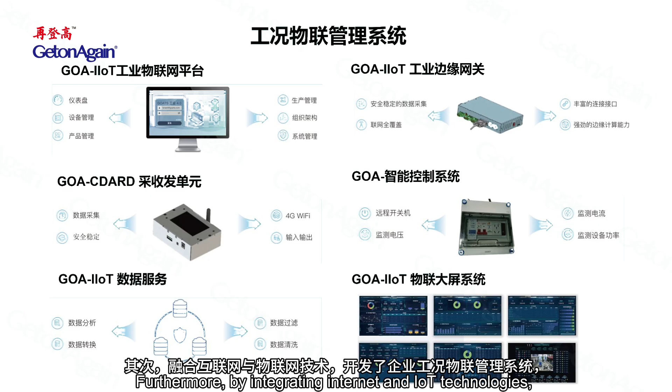Furthermore, by integrating Internet and IoT technologies, the company has developed an enterprise operating condition IoT management system, which enables the interconnection of all equipment, products, energy consumption, environment, and security within the enterprise. This system interacts seamlessly with the enterprise digital operation and management system, building a multifunctional integrated platform for enterprises. It enables functions such as data collection, real-time monitoring, data analysis, and remote management.